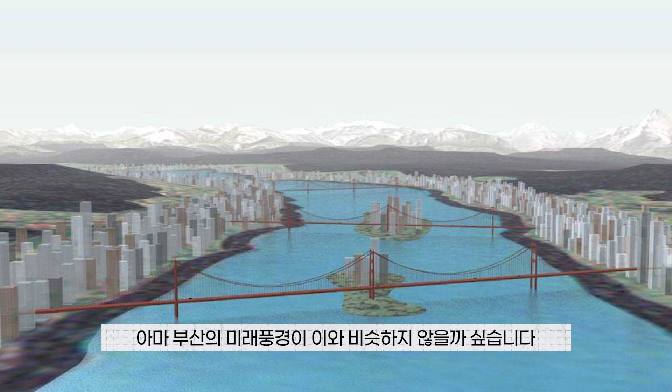We make more lakes to keep the water longer in Switzerland before it goes down to the Netherlands or to Italy, and we concentrate the building. So here's a plan for Zurich, the capital, to use the lake as much as possible and surround it. Looks almost like Busan, no? In the future. So that's what we are doing.

We clad the south sides of the mountains with solar panels, so that you have more solar energy. And it's happening at the moment - these are images where the avalanche instruments actually become the instruments for the solar panels. So I immediately suggest that these things are happening.

Cities now. I will take you to Paris for a moment, because if you think about the city, Paris is 12 million people. So, okay, that's substantial. What we made for the city of Paris was a calculator - how good is Paris in its action?

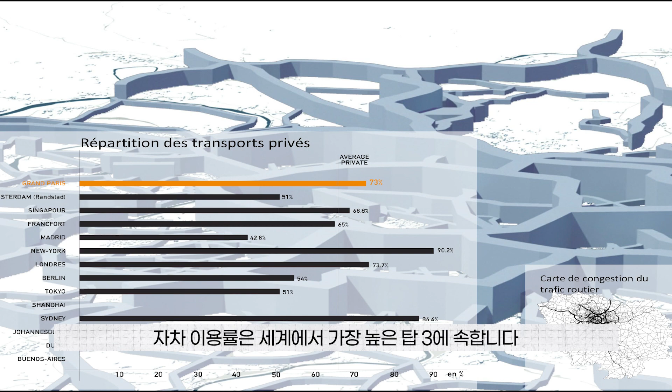So here you see something. What does it say? How many Paris people use public transport versus other cities? Paris loves cars, they hate public transport, and I didn't expect that, because it's not only the center, it's the whole country that does that. But if you compare it to Hong Kong, it's terrible what is there. So here you see also in private transport, they're in the top 3 of the world in cars, which I didn't expect at all. So that says something about that city.

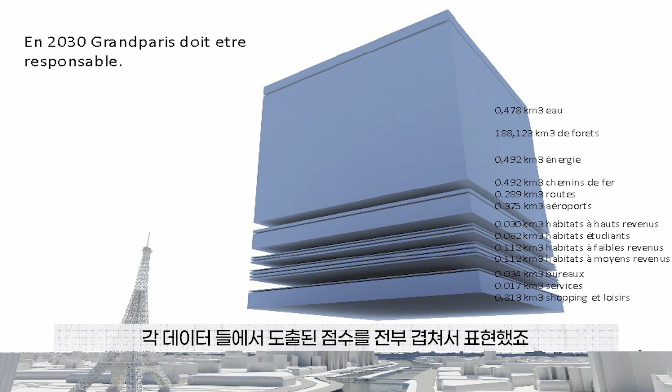If you make a map of all the things - how good are you compared to other cities - then you get this score. And then you compare it with the other cities, like that, then you have an agenda to make something better. So what can we do then in the case of Paris? Here the overlay - these are action plans of the scores to improve it.

If you, as an architect, ask how many cubic meters that is to repair it - I need more forests, how many cubic meters is that? I need more repair of the roads, other kinds of roads, so many.

This is the whole cube that we would like to give to Paris. This was my present to the president, to say, okay, this is my cadeau, mon cadeau pour vous. And then you spread it, and you use every project to show how good it is. So here you see one.

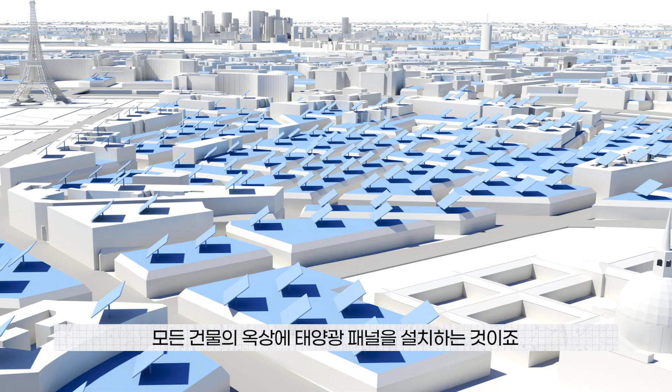This is the new law in Paris that every roof needs to be covered with solar panels, also in Haussmann, which is a beautiful proposal at the moment. If you do it like this, then in a way this will come like this. Now happening - took 10 years to get that done.

I go further. All the trains in Paris stop - they have what they call a terminus, they go no further. Stupid, of course, because I want to go from Rotterdam not to Paris, but to Bordeaux. So I have to continue, I have to change trains, it takes me an hour to do that. And it's very elitist, I call it - it's elitish. Well, you know it, how Paris can be, is in that way.

So here the proposal to connect them. This study, taken after our suggestion 10 years ago, is one step further to make this new tunnel under Paris. From Gare du Nord it goes now in this direction, so that you can cross it in this sense. That means we have a new central station under the Place de la République, under the Republican Square - wonderful, the best name we can imagine - and that transforms that into this kind of new pit into Paris.

And that means also that all the rails that are north of the stations can become neighborhoods and transform into this new density. So you can see in action, compare it, and you get then this kind of plan.

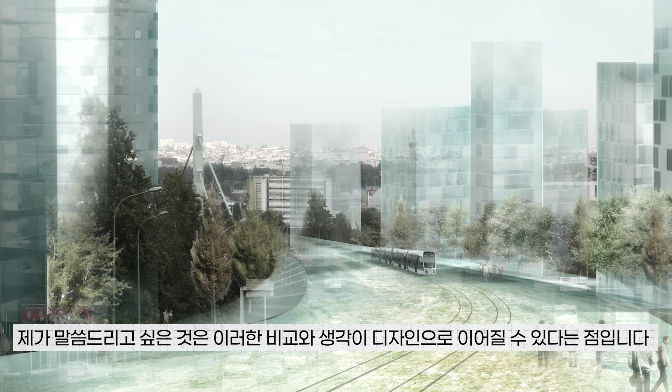I can go further, because there is this ring road that is there. And we are working on a kind of new metro map to use the ring road also, instead of this, into a new metro, that turns it then into a zone on top of the road, which becomes a park with new density surrounded. So with this, I hope to show you that these comparisons can lead to actions and to design.

I take you to Almere. You have never heard about Almere. Almere is next to Amsterdam on the right side, and it's a city that's designed in the 80s. It has now 150,000 people, grows to 300,000 people soon because of the plan. So we are asked to be the supervisor of that operation.

This is Almere. You have hundreds, thousands of these kind of houses, and it's made in a very nice way - houses in the green, neighborhoods in the green. It's a garden city of garden cities. About 7 garden cities are already made.

So what can I do then when I have to double that city? I don't want to kill that. The houses are too young, people just bought them. So I have to not touch it.

So what we do, we make a new metro line in between all those neighborhoods, and we make 4 new garden cities. Every new garden city does something with nature. This is the line with the 4 cities that come across.

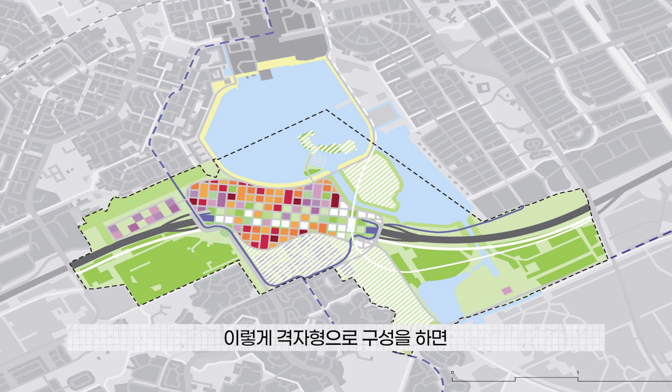This is the first one, that we are making a city in the lake, that loves the lake - I'll explain that later. The next city is a new dense garden city next to Amsterdam. The next stop, we make a lake, or the lake is there, and we make a city around it. And then we end in a landscape where you stop in a city where agriculture is part of that city. So 4 times and 4 ways to make new garden cities is what we think.

So what I try to say is that every city has a specialism. That's what Almere is. Now I give you examples, because this was designed 8 to 10 years ago.

Now we make Oosterwold look like this. It could look like Russia, but now we transform it into this. How do we do that? We say that you can build what you want, but you cannot harm your neighbor. You have to do and participate in agriculture, you have to help a farmer with that, and you have to solve everything.

That's happening now. These are all the plots that people buy and design themselves, and that's how they make it on the landscape. They do it together - they start to make agriculture and houses, they make the water facilities by themselves and all the energy. And they produce wine, apples, and sell it in their new markets that they are making. They make that city collectively.

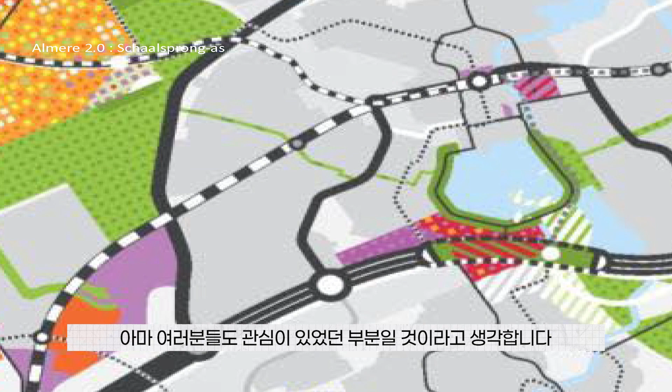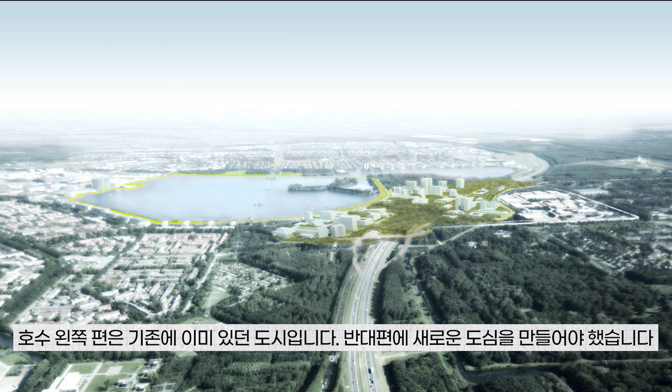Next city, Hortus. I think this is interesting because we used an expo here also to make a new city. This is that city, that part next to the lake. You see that left of the lake is the existing city, and there we have to make this new part of the city center. Here we won the competition for the Garden Expo of the Netherlands, which happened last year.

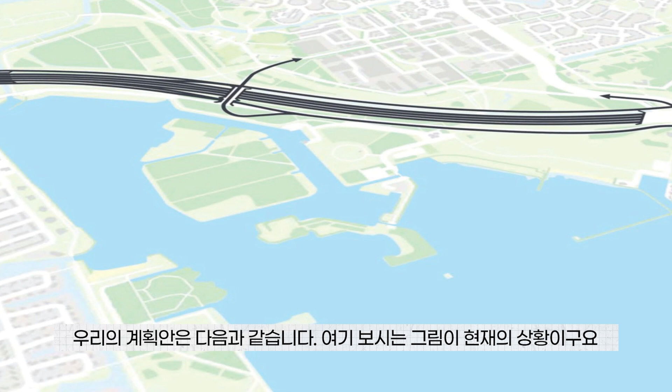What's the plan? If you have, this is the situation, this is our plan. Many small streets we are going to make, and many plants, I will show that more later. And then we drape it over this area.

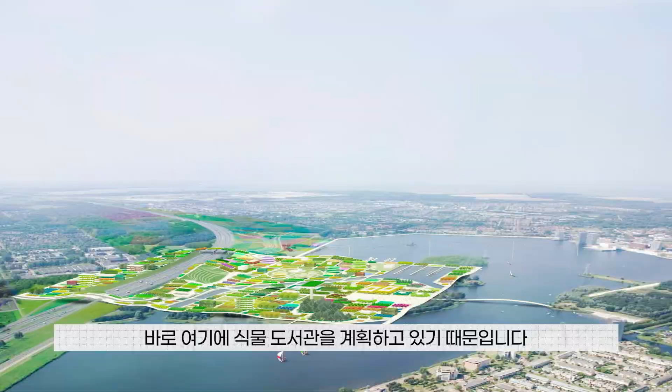And why is it square? Because it's a library of plants that we are going to make. So this is the plan, with all the mini streets, the mini plots, and everyone - sorry, this goes next. This is my client, one could say. If I come closer, these are all the plants in the Netherlands.

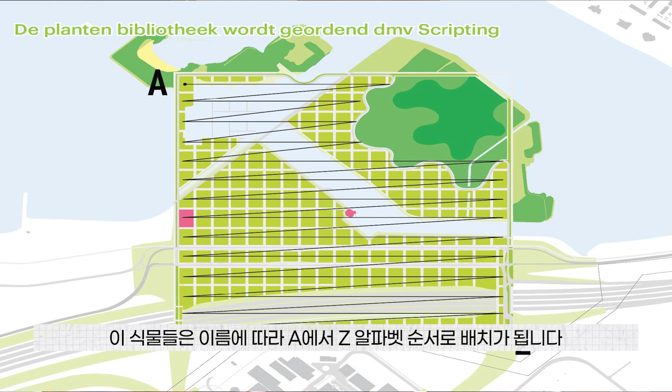What we try to do in Seoullo, we turn it in the same way, make it now in Almere as the library of plants. These are all the collections, and how we place them, from A till Z. So alphabetically, they go like this, and if you zoom in on that calculation, here you see how the software calculates the sizes of all these plots.

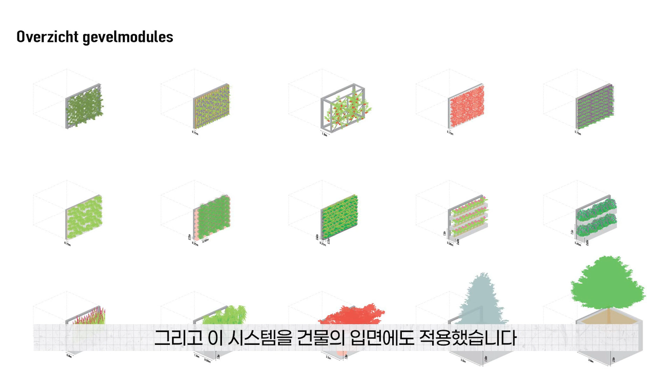Then these are the species that go over the site, and that we then also use in the buildings, in the facades, same types. So you can get - well, here the landscape goes up, over it, and further. So it's part of the library that comes then together in this area.

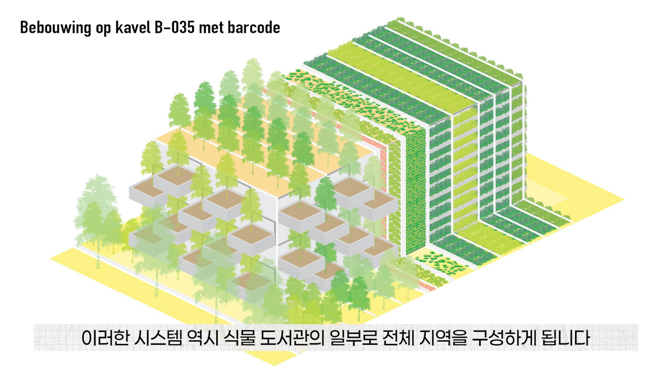And how does it look like? This could it look like. How can a boulevard look like? The nice thing is, architecture doesn't matter - any style, no, landscape is what wins here, is what we wanted to say. So here, a younger picture of me, where I try to explain it to the mayor and how we were dreaming about it.

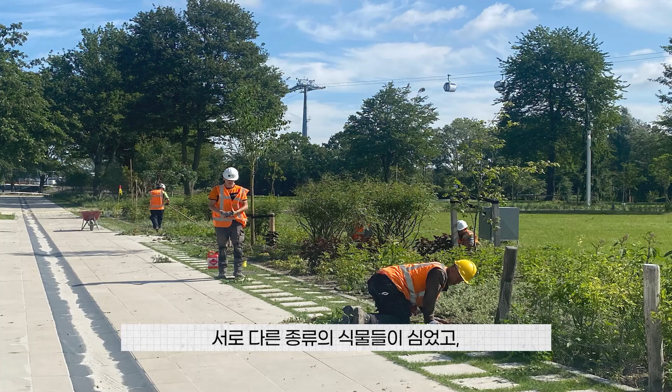I will show you how the public space was done with all the different streets, how we planted the species in it, how we added the bridges of the same wood that we could find, all recycled, even in the sizes, and how we then start with the first buildings in it, covering with the plants.

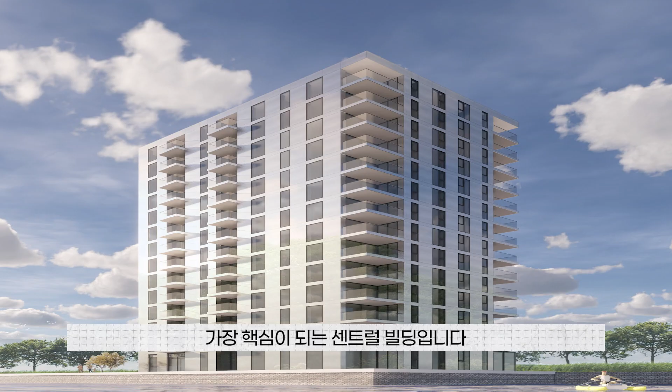The central building was this, but it becomes the library. It's housing, social housing. So you can see how all the species are on the facade, and how you can find now all the species in the surrounding. On your balcony, you discover which plant you are.

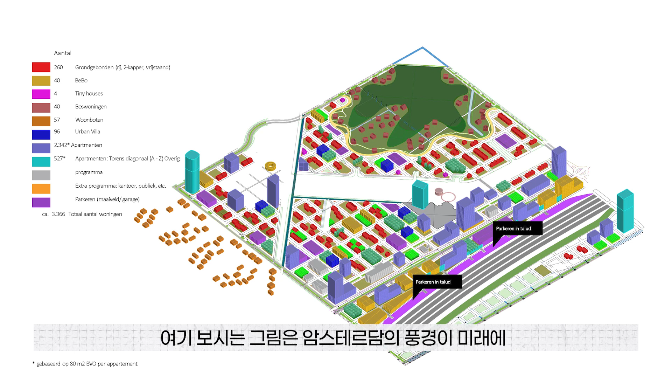And what's the next step? When you fly now to Amsterdam, you see this coming up below, and this is going to happen in the coming years. Another 6,000 units come in with this kind of detailing, that love of landscape is what is going to be. So you can do a good expo, but then you have to be so bold and so direct, so that it becomes inspiring for any committee to judge yes to that.

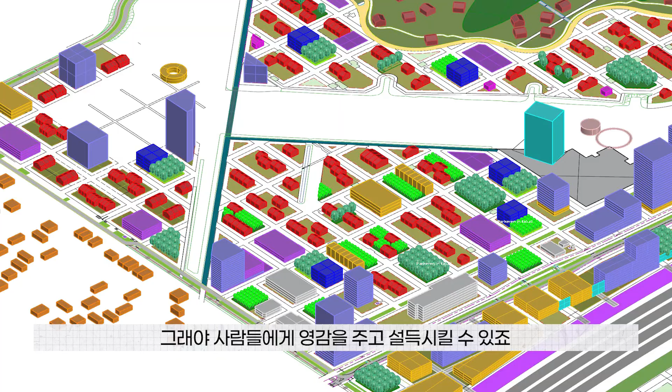Next city. I'm still in Almere. Can you go further? There, stop. Now I go to IJland, the island city. Because what can I do? If I look to the lake, it's white.

Other lakes are blue. That means this lake is not good water - it's like coffee. Why? We made a mistake in the Netherlands. We put no stream through it. It's very shallow, there's chalk in it, and the wind brings it up, and it becomes completely white.

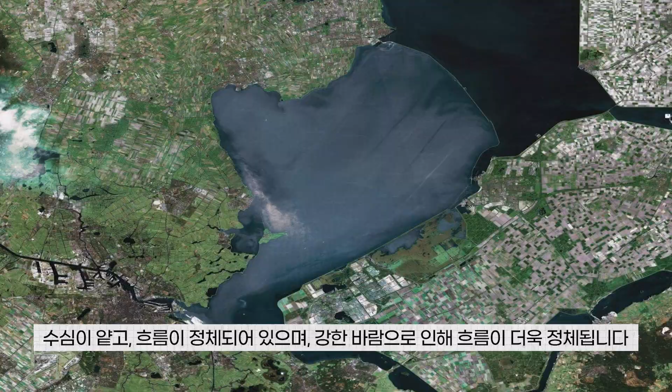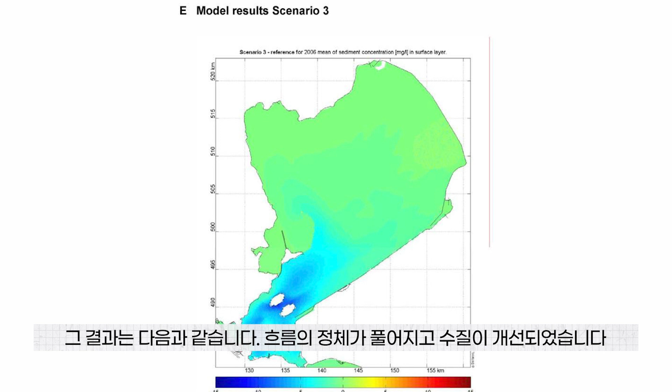So what do we do? We have to stop that. So we block it now, and the effect is that this chalk, which is now like this, calms down. But then we filter it in swamps. We use that underwater dike to put it there, and we make that also along the coasts of this lake.

We stop water coming in from the sewage systems, from any city all around it. And then we make a new metro line that stops there, just in the middle. So there we make a new city, 20,000 people, which can only be reached by boat or by this tunnel.

So here it will start, and when this is the situation, we make this dam. Just a swamp, just reed everywhere with houses inside, so that helps to filter this water and turn it into pristine, beautiful water. You don't believe me, of course.

When it's going to be built, we made a test. So here you can see a picture. When you fly again to Amsterdam, you see below first, say, 5 islands that are used to test how that would work, how the water is going.

So I'm super happy. Does it cost something? Yes, this cost 50 million euros, more or less, this test. But for 20,000 people, how much water do I serve? So you can calculate that bigger budgets are sometimes also good to do.

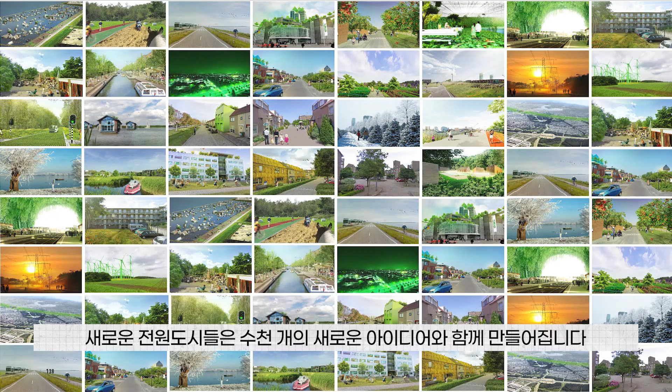So the new garden city can also be with 1,000 ideas. And that is, I think, the most important tool of Almere to get it, say, democratized, or to get everybody involved.

I go to Marseille. Why Marseille? Because I think for the architecture festival of your city, it's nice to be inspired maybe what the next step could be, and to show you what we did there in the case of an art show.

Marseille is on the south of France, on the Mediterranean. And Manifesta is the name of the expo, the biennial, every 2 years. So once it was given to us to make the design of that expo.

So here you see images from that expo time that came out, and the book that we made to position artists. Every artist should have a meaningful, say, position, is what it wants to say. So how do you do that?

And so we analyzed the city. This is how the city is, this is a central station. There's a lot of poor people that live there, that paint their city. There's a lot of art. There's many kinds of, say, non-French people living there.

They tried to do that in this way with Jean Nouvel. But actually, it's a very puzzling city. The grand puzzle, the big puzzle, is what we face. So we try to explore that.

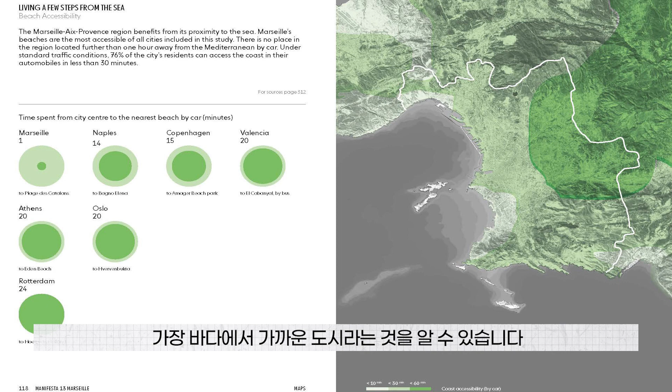It is the greenest of all port cities because of the areas that you can see there. Oh, can you go back? It is actually very healthy because it has the most amount of tracks for walking.

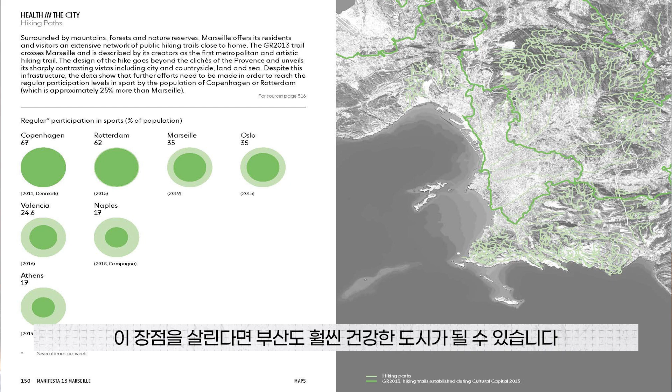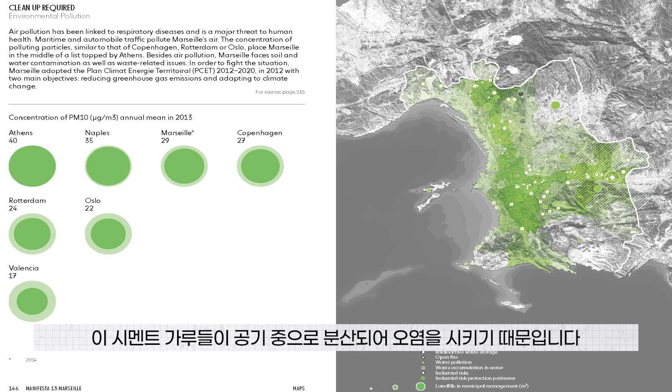If you do that for Busan on all the mountains, you become much more healthier, and there are not enough, when I have to say. So if you look then to dirtiness, actually Marseille is one of the dirtiest places. Why? Because they have a lot of, say, cement industry that goes through the air and can kill you at that moment. So they also love cars, more than other places.

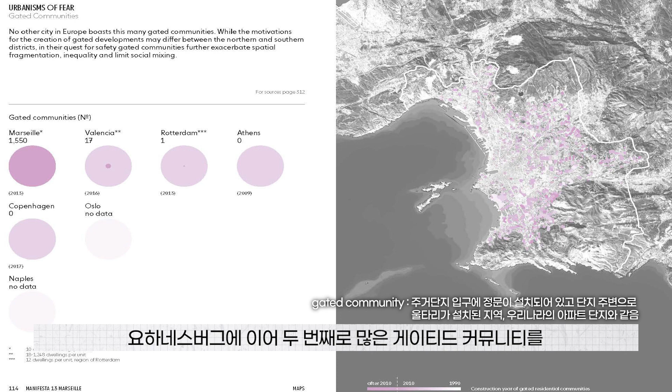They have an enormous amount of traffic jams. They have the highest inequality level in Europe. The difference between rich and poor is so big that you get fights over that. And that leads to many homeless people, which leads to unsafety in the city, and to poor housing conditions. There's a lot of fear, and the highest amount of gated communities after Johannesburg is Marseille. This is shocking to see all this. Comparing means you can do something about it.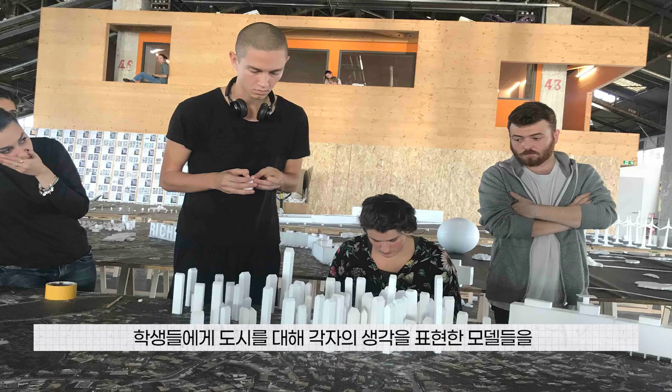I will speed up for a moment. So what do we do next? The first thing is we invited many students, and we made a huge map of Marseille and asked them to put their model on it, what they want to do in the city. I will present how that leads to these kinds of ideas for Marseille.

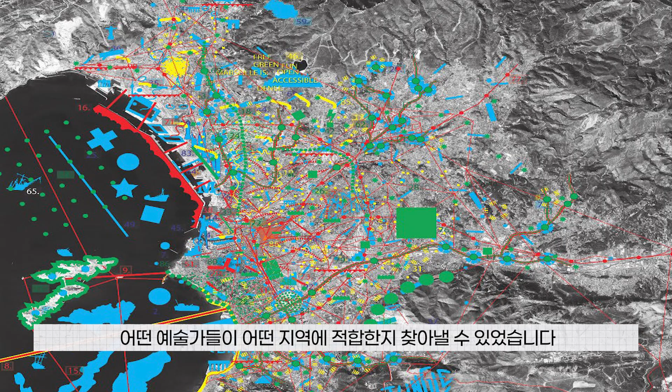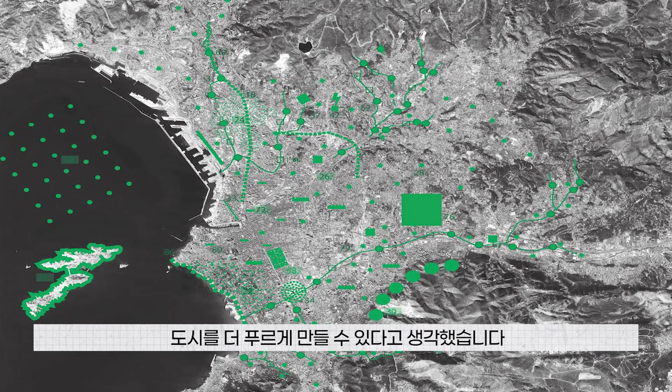On any spot, we can put an artist to work, is what it says. Then we can sort them by who contributes to greenness, and you have these projects that make the city greener all over the place. I'll give you some examples, like this model, to make the street greener. It's now like this, and it becomes that.

Or this one, where he wants to cool the city because it's too hot in the summer. So if you have this cathedral, and we make these nozzles around it, you get a beautiful cloud that mystifies, in that way, also the religion.

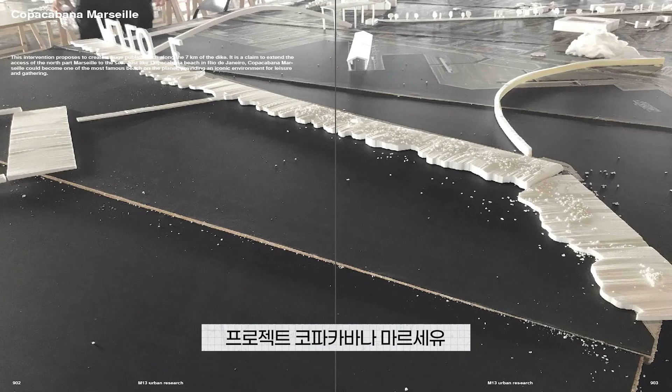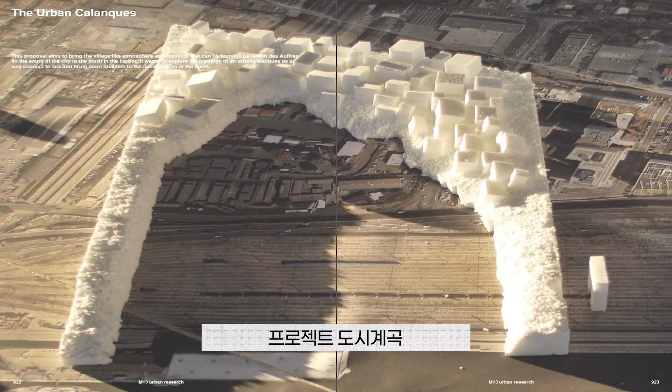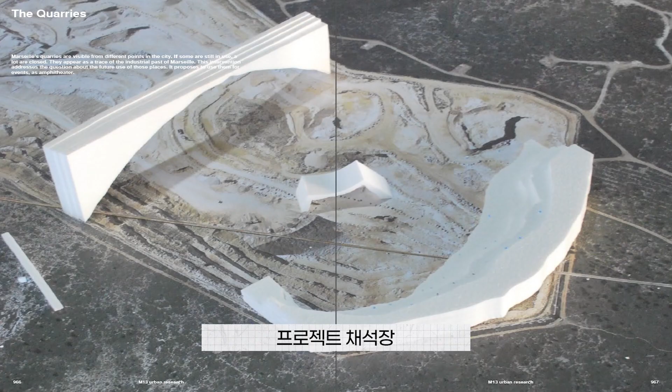If you want, pieces of the port could transform into fantastic pools, if you imagine getting there by one dike. And for the quarries that cause all this dust, we can also inhabit them with plants so they stop.

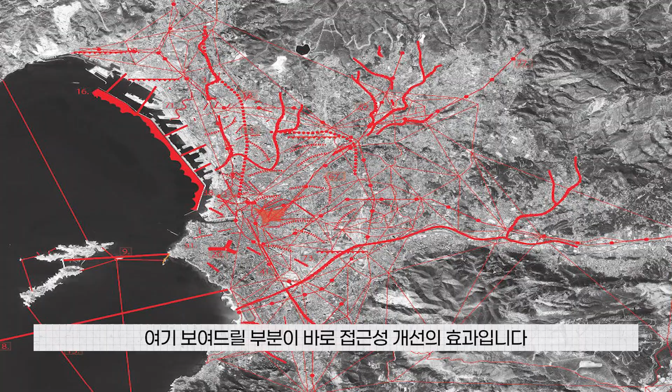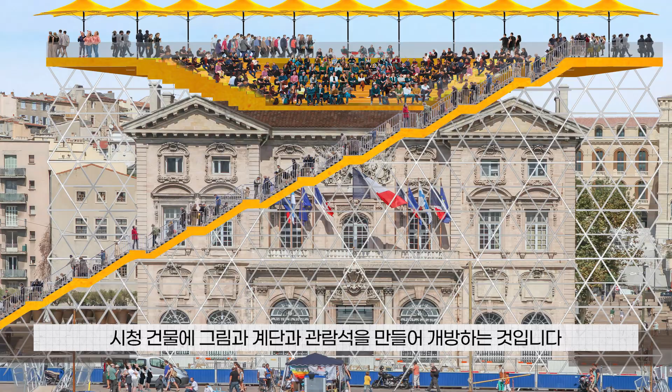Accessibility is another theme in these projects to make things better. Here you can see the effect. One accessibility project is to make your politicians more open, so this town hall becomes more accessible, by making bridges towards the dams in the sea.

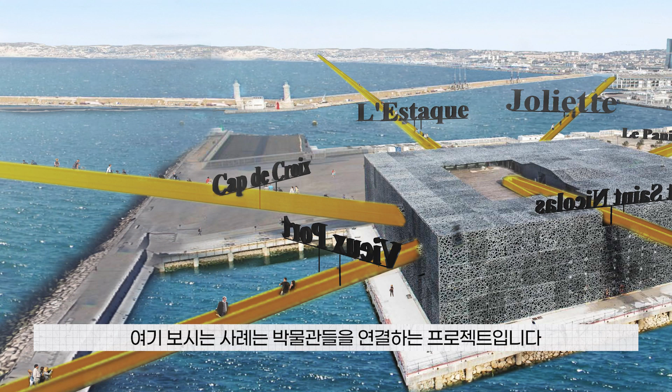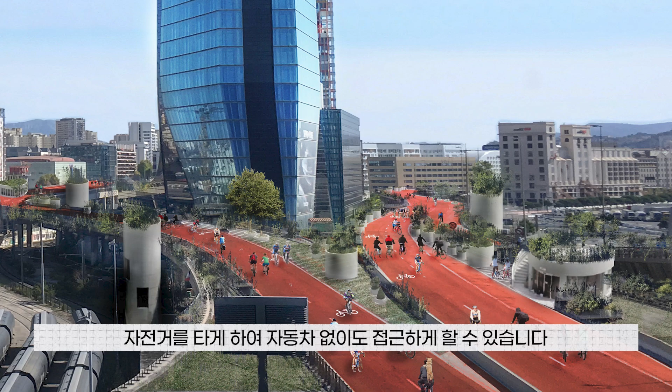This project is built, but this is the continuation of that museum into the next areas, by extending the pathways into the city, hiking from the city to the environment, biking into the cities, and transforming a zero-auto route into something better. Or imagine certain streets could be much more pedestrianized—instead of this, you turn it into that.

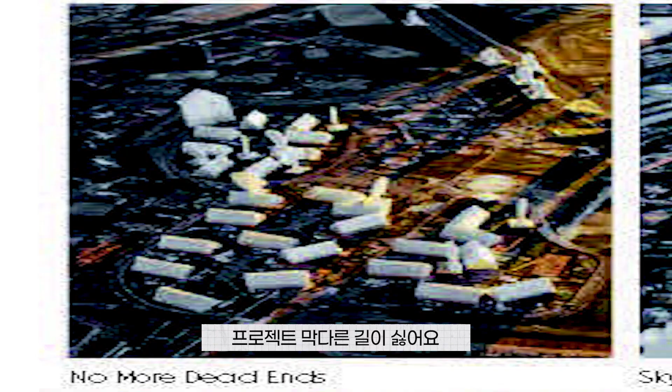It's to stop the dead ends in the streets of the city, because the rich people living at the end—that's so horrible, how can I escape if someone is hijacking me? So if you open them up, that would be a beautiful way of addressing that. To make more metro stops in the poor area is what this project also shows—here we need more metro stops, is what it says.

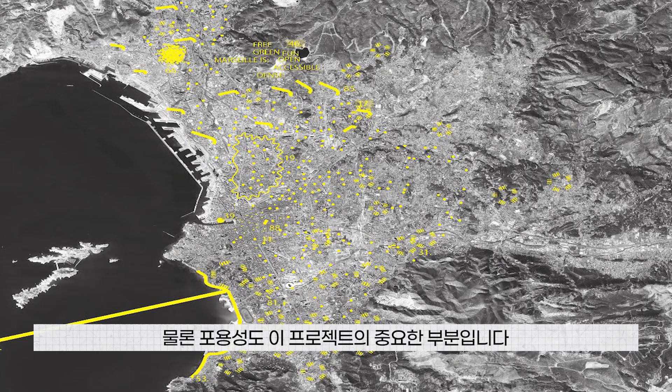And of course, in inclusivity, there are a series of projects. Here they are. Here, the mount is now only Catholic, so make here also the other religions on this mount, so that somehow we live together, is what it wants to show.

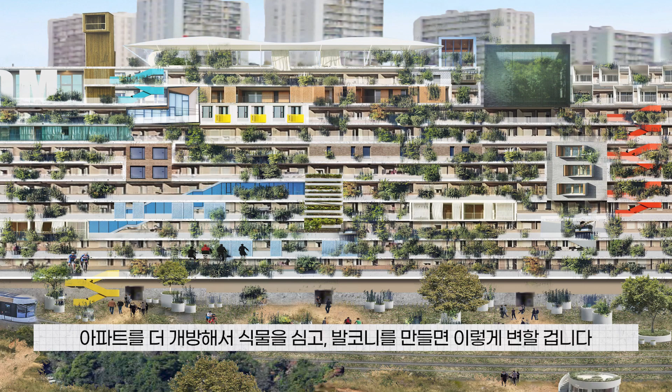If this is a slab of social housing, which looks like this at the moment—very dangerous for shooting—try to open it up, make it more friendly, add balconies wherever possible, is what this project aims to do.

The soccer club Olympique Marseille, which you may know, is partly very good. But it would be so beautiful if this stadium had neighbors, so you could look into the stadium, have a beer or wine, and say hello to the supporters, is what this student was thinking. Making housing that welcomes future African neighbors is a project which is so important for Europe, according to me.

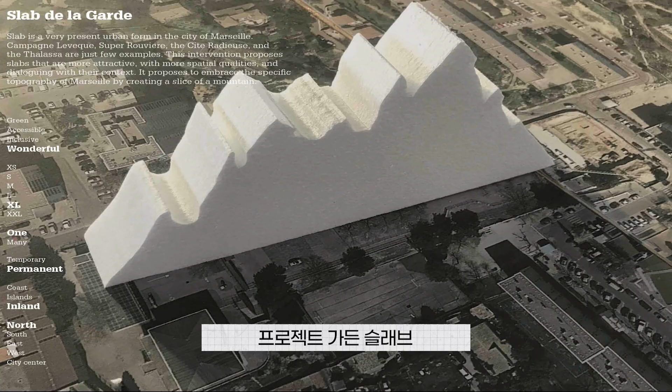And then last, we want to share that with other people, so everybody could contribute ideas to put into this exhibition. They make drawings like this, dreams of how Marseille could look. And if you combine them, this mosaic is beautiful. Then you have mini projects that help the bigger picture, which is what it wants to do.

So, for the architects here, yes, you can contribute, but we want to make it stronger and more visible. That's what Marseille is about.

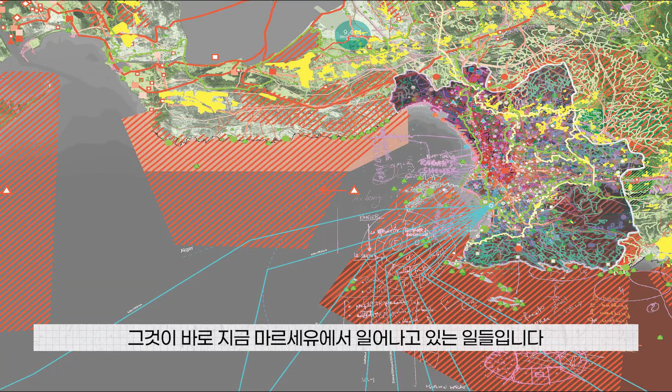Then he died, and suddenly people became angry and got rid of his statues, saying okay, we don't want this anymore. New leaders came who were much more democratic. So what is Tirana, the main capital, then? What can you do at that moment in this capital that has this kind of communist past?

It started working first with Edi Rama, painting what was there to make it nicer, painting it with different colors, cleaning up the mess left behind with different water treatments. Then, as the next step, we were asked to work with him.

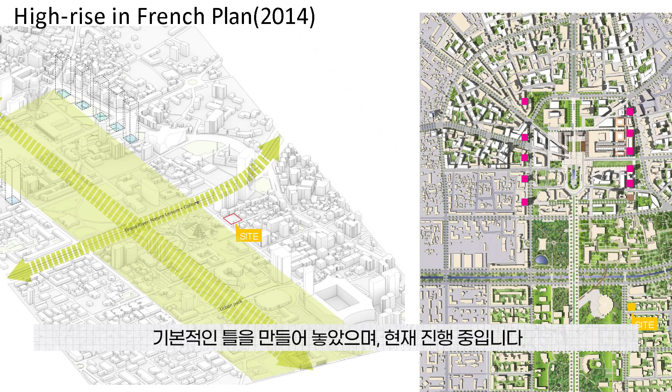And what is next to do there? This is what we're making now, surrounding the pyramid: the urban plan, first laid out by French architects who made this order, but actually this is what's happening now. We cultivate densification, and each time another architect makes something. So here you see that happening.

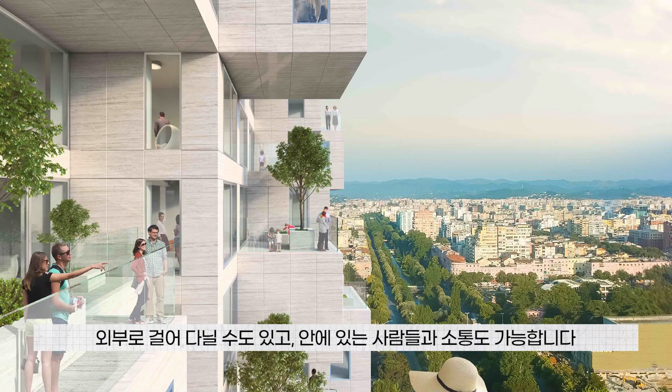And in 2015, we made Albi, which is on that spot, which basically shows the map of Albania. Every house is part of that map, and you can take a beer and give it to the neighbor on the side. So what is next in that way? You see it now under construction. You can go there.

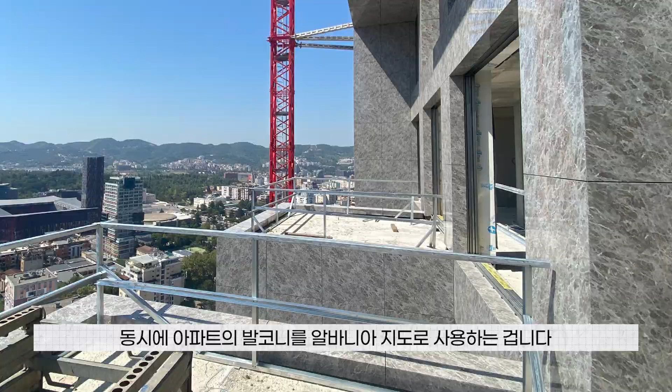The balconies are touching each other, and you can see each other when you come out, in a way. But you're a part of the map of Albania. So that's what it wants to show.

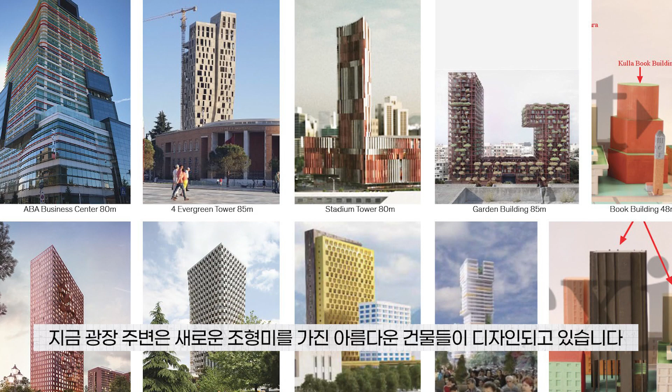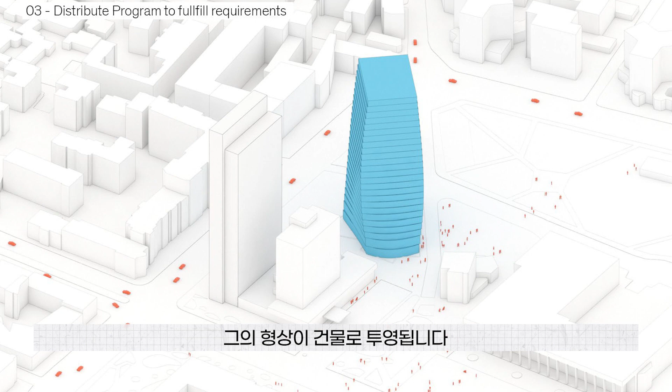That's how we should do it also in Busan, that anything you make is fantastic, and every time you ask the question, what's next? So that is what is now happening with Skender also. In this case, you can go into this plot, which reminds of the hero of the country, the one that made the independence. It stretches the building, fits it to the side, in such a way that it becomes some kind of memory of him, overlooking the area.

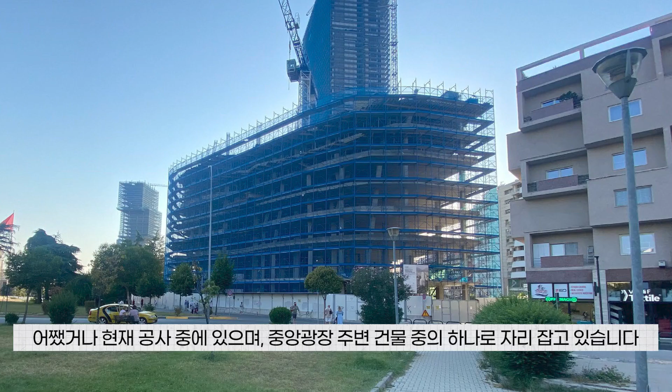And I know this is intriguing. Is this good or bad? Is this nationalist or not? But it's under construction, and it's part of the collection of towers that are there.

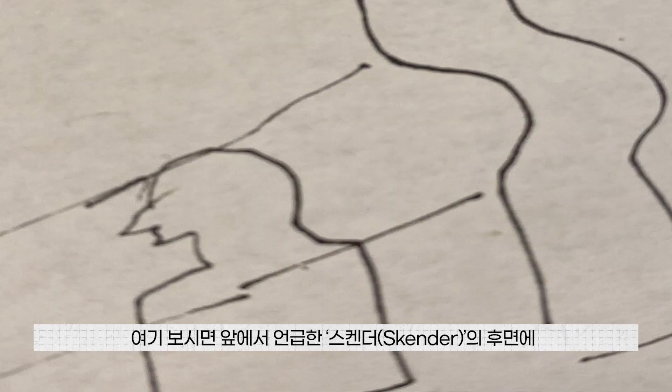And what is next? We do the halo. What is that? That's when you react to your neighbor. So here on the backside of Skender, we developed this tower that is like the shadow figure, visible from outside. So you give this as a background.

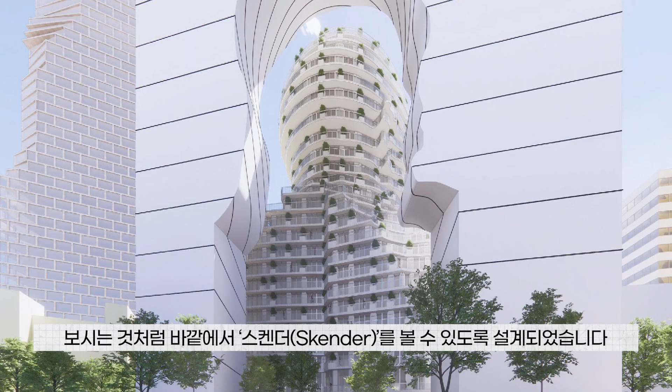Can you do the next one? And that becomes, suddenly, this component that makes this plaza towards this side. So that is under construction currently also.

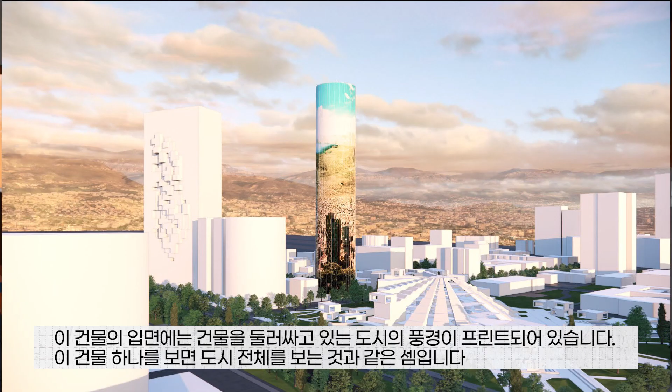And then what's next? The needle, I think, is very beautiful in the collection because it wants to show the whole city in its surrounding by a print on this building, so that you can always have this overview.

With that, I hope to give you some kind of inspiration that urbanism is cool, and that everything is urbanism with it. And with that, I do hope that we can think about Busan with this workshop that comes soon, with you, with all others, to turn it into a Busan Next. Thank you very much for your attention.